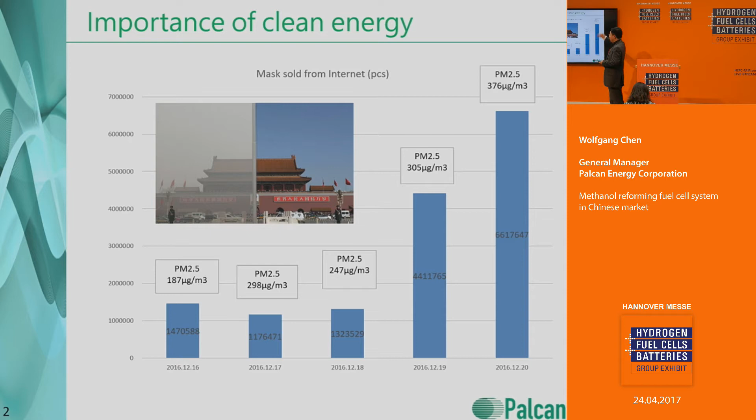This statistic is interesting, with the picture being clear—this one is masks sold. That means people buy many masks when they feel the air is polluted. So you could see everything in China has potential for increase, even masks.

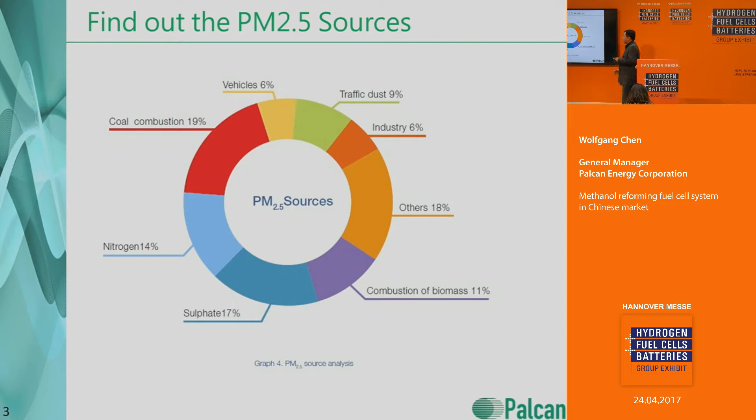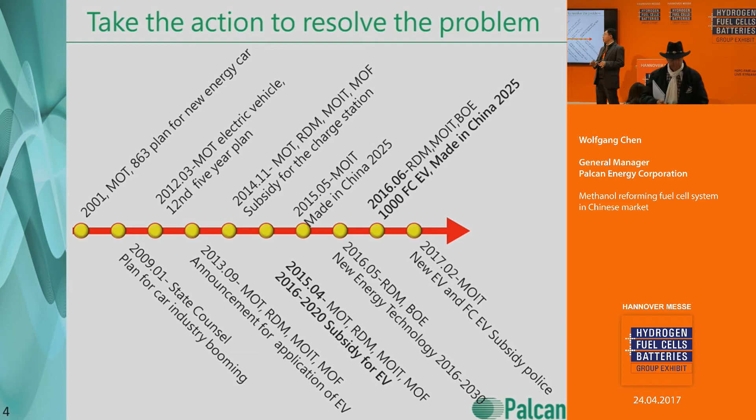How do they get clean air? They started not only with technology, but also with policy. Even from 2001, the Chinese government has been trying to have policies, laws, and regulations to help the people and the industry use clean energy.

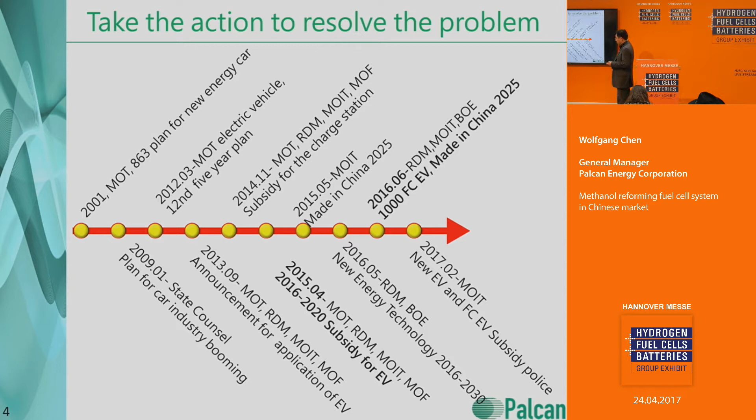Using clean energy normally means it's too expensive, so the government had a strategy to give subsidies to new technology. New means changing coal to something else. Everybody knows that when you burn coal, you have emissions, you have particles. So in stationary applications like power plants, they change from coal to methanol or natural gas.

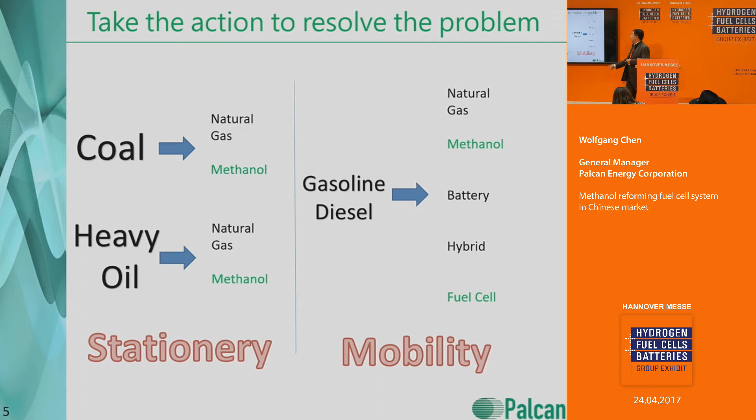Mobility is the same case, but in mobility there are more choices: natural gas, methanol, again methanol. Methanol is clean energy.

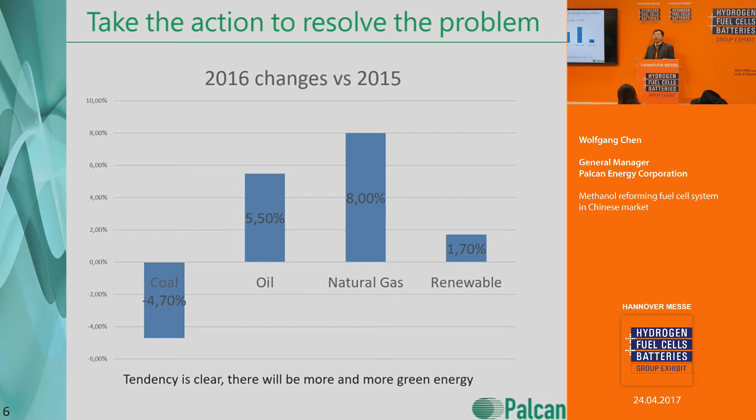You could see that year by year, coal consumption is decreasing. Based on government support, people use more and more renewable energy and natural gas, which is defined as clean energy. So here you could see each year, from 2012 to 2016, there is always an increase in renewable energy. That means clean energy is coming, renewable is the future.

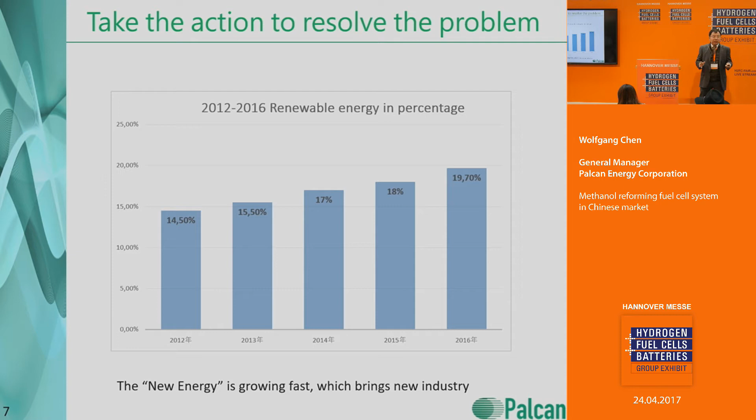One of the most important sources for clean energy is methanol. Methanol is not as clean as hydrogen, but it's still affordable, cheap energy. With methanol you could do a lot of things: direct burning with a motor, or make it a chemical liquid that you could mix with gasoline or diesel.

Again, here in this exhibition, the most interesting thing is methanol combined with electrochemical processes to become a fuel cell.

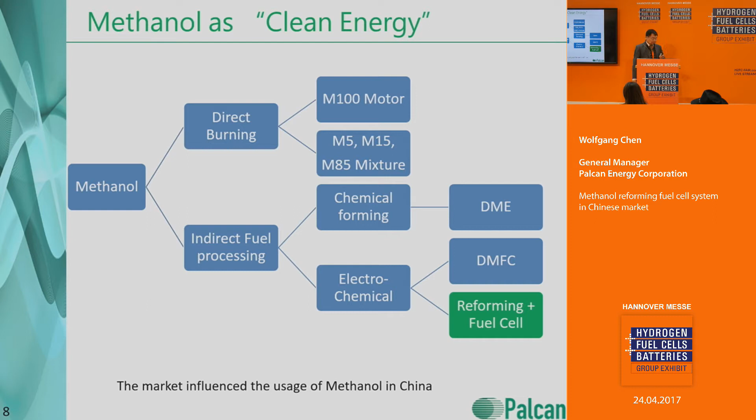Based on such tank stations, you could find methanol in China easily, and the government has made norms and standards for mixtures. For example, M5 is 5% methanol and 95% gasoline. M85 is 85% methanol and only 15% gasoline. M100 is very interesting and is very close to the society of hydrogen.

This picture is interesting because it shows a typical Chinese table in a restaurant—there is a glass, you could put your dish there and everybody could enjoy that. Here is a bottle—in this bottle you could see methanol could easily be sold and bought in China, with a price, after so much distribution, of 0.4 euro per liter.

It has the same effect as gasoline, because the methanol reformed fuel cell system has much higher efficiency than a normal diesel or gasoline burning motor. So at the same price per liter, 0.4 euro, you get the same performance. For example, with a personal car you need only 10 liters per 100 kilometers, so that means you save a lot, and you could get your methanol so easily in China.

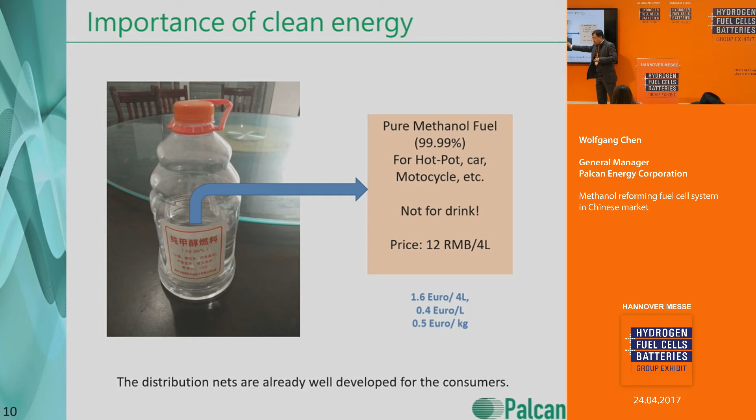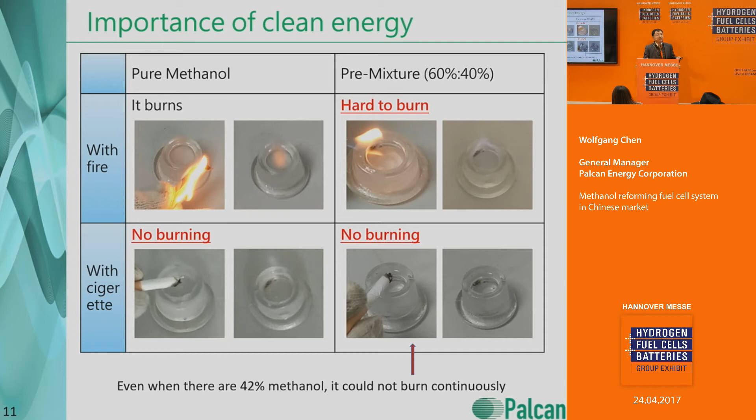Here is a very simple experiment which everybody could do to tell people methanol is safe—much safer than a complicated test. Nowadays, from the internet, you could only see one picture about hydrogen explosion—there's only one. But such an experiment, everybody could do, trying the safety and burning point. It's easy to let people understand it's safe. So methanol is safe.

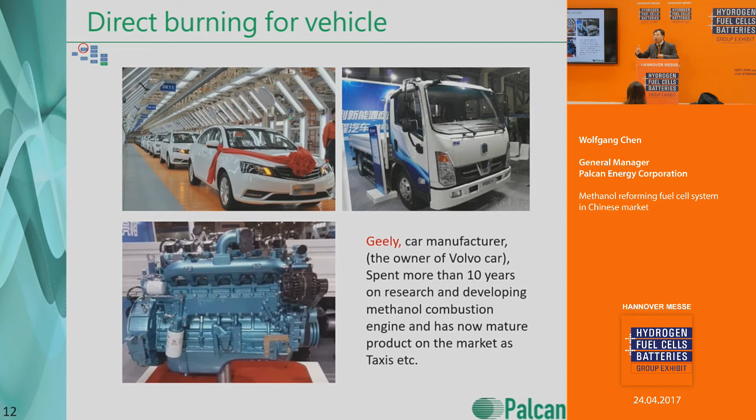And here you could see methanol could be used for burning, for industrial use. This is for work—if you go to a Chinese restaurant and see your dish coming very quickly, that means they might have changed their natural gas burner to a methanol burner, because they increase efficiency by 10% cooking with the higher temperature from methanol. So everywhere is methanol. Methanol is ready for fuel cells.

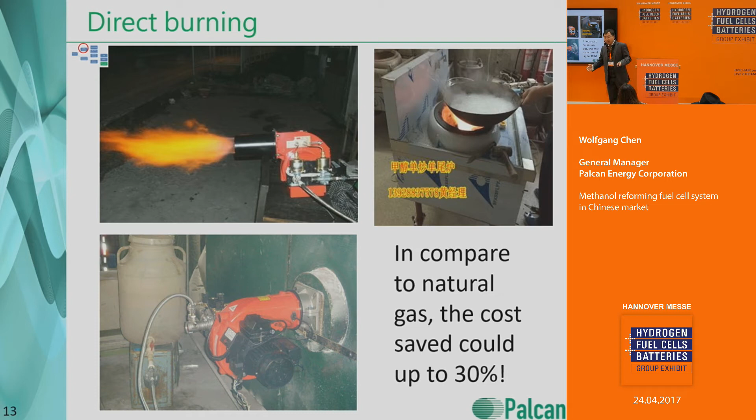One of the markets is the DMFC. Because China is big, there's a lot of area which needs electricity. With DMFC we could make a good hybrid system.

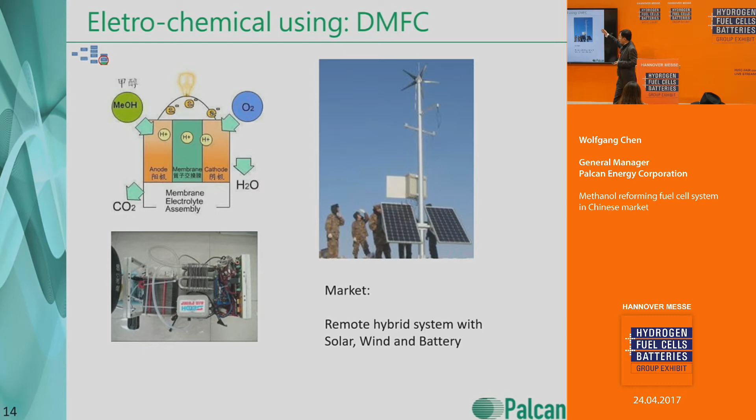Besides DMFC, we have also methanol reformed fuel cell. That means you have the reformer, and then you have more possibilities to get your hydrogen in different forms. Here you have PSA adsorption to get pure hydrogen, you have palladium to get pure hydrogen, you don't need to purify it, you could go to HT-PEM, or water gas shift, or SelOX, you have methanation. So in the world there are a lot of solutions.

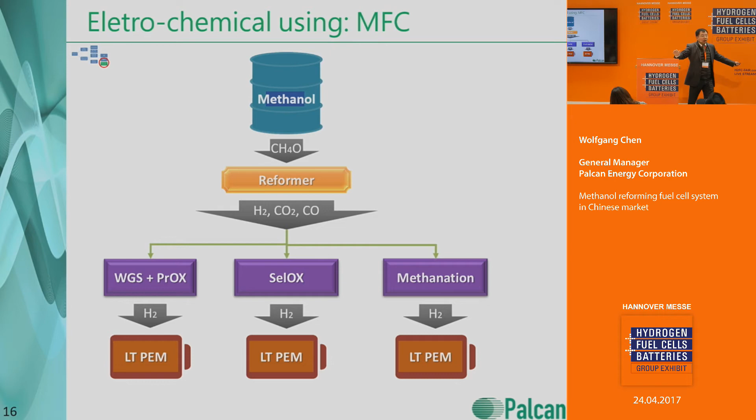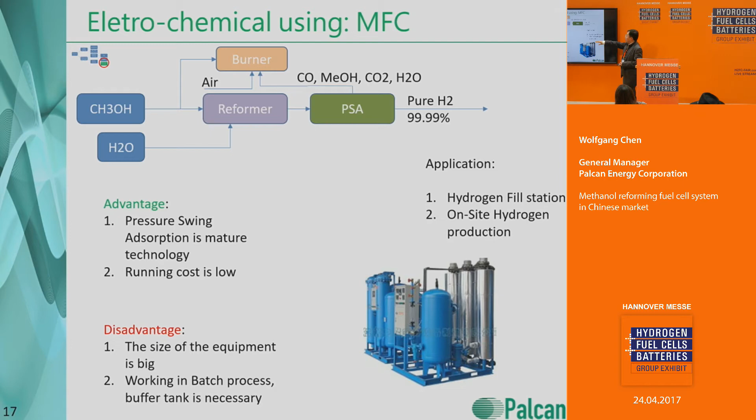People could bring the technology, go to China and make the hydrogen. There is a little bit in detail about different purification systems and different applications.

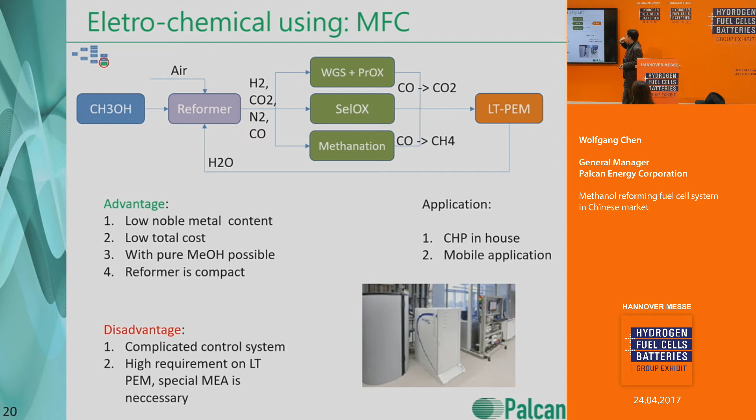So you'll see here palladium membrane, you could see here SelOX water gas shift, and a short bit about what we do.

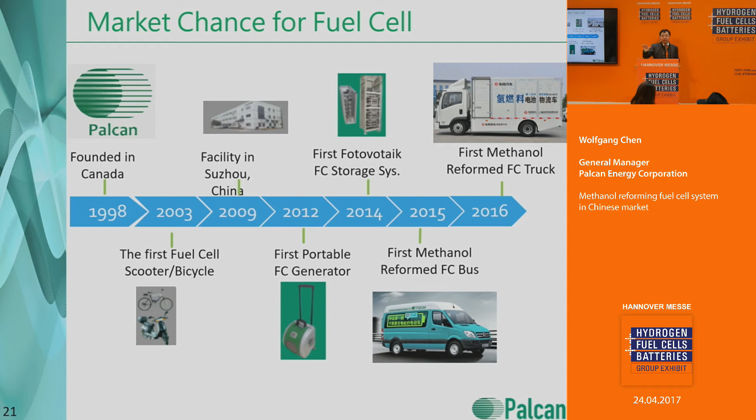We had found the market, and now we have the possibility to introduce ourselves a little bit. We started the business in 1998. It's a long history, but even now, in the past 3 years, we found the opportunity in China with methanol combined with fuel cell. That's the key point for our development.

This is again the background. In 1 month, you'll see here around 60,000 electrical vehicles sold in China, which means China has more and more renewable energy.

At the same time, we see some disadvantages of batteries: short distance, charging time, degradation, and you need a lot of investment. This makes it difficult, but still China will have 5 million stations by 2020.

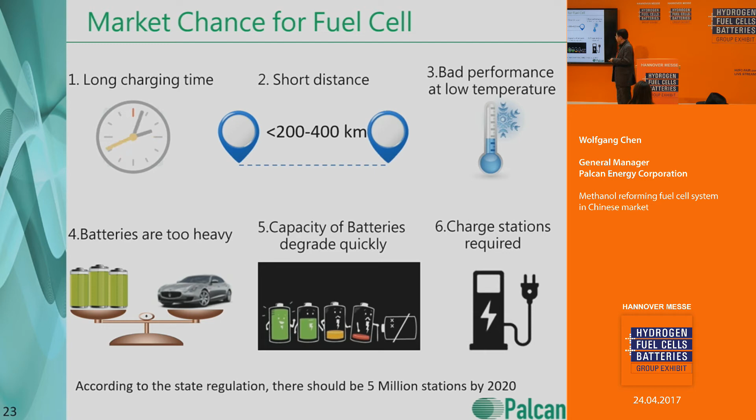So how could we resolve the problem with battery? The solution is hydrogen. Hydrogen is good, welcome, but still something needs to be resolved. Palcan is ready to support that, but remember it takes a little bit of time.

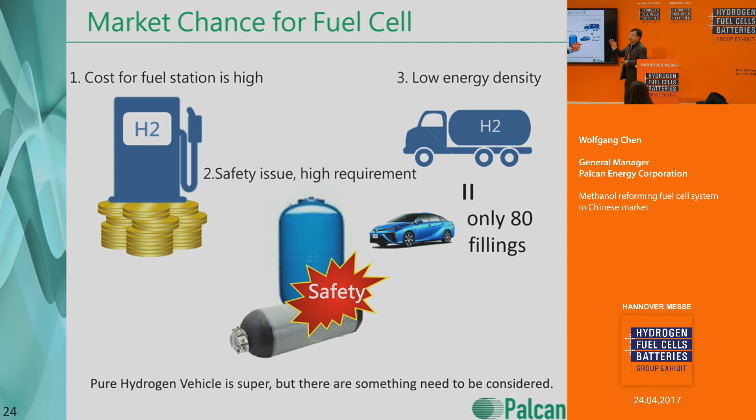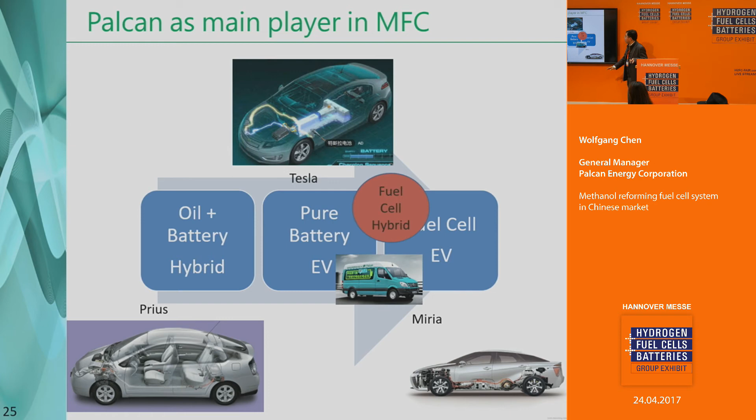So what does Palcan do? Here is a hybrid, from oil to battery. This is Prius, from Tesla to Mirai, there is a hybrid. This is our solution with methanol fuel cell hybrid. This is the solution, you could do that today and tomorrow.

It's a multi-purpose vehicle. It could be used to help electrical vehicles which have problems. When they have low electricity, we go there. So it could be used everywhere, even for telecom.

So what Palcan does is power management system. It's battery, supercaps, and fuel cell. We make our controller to help different systems work together.

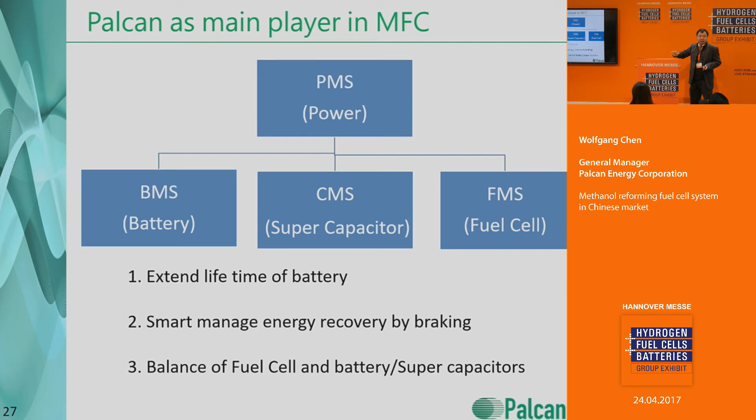This slide is very important. Everybody wants to go to China, they see China is the big market, we go there, there is chance. But one thing is quite important: you must understand the Chinese government and the market.

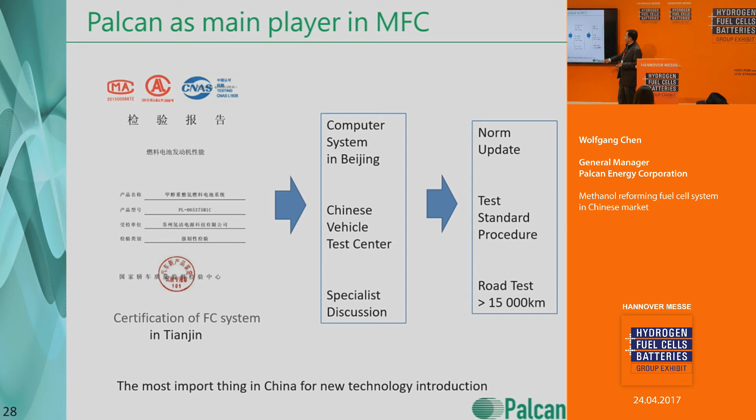Palcan had to do a lot of discussion with the government to let them understand fuel cell is not only high pressure tank, it could be methanol, it could be liquid hydrogen, it could also be hydrogen storage in metal form. So to let the specialists understand that, we need to educate them, introduce them, and let them see our test report. Palcan is very strong in this case, to help people go to China, change their product to a real market-accepted market, and try to get the subsidy from the government.

So this is our strength.

Again, if you see electrical vehicles with higher energy, you need heavy battery, but we have the solution with a small vehicle for 1 megawatt hour energy. This could be used to charge electrical vehicles, for emergency backup power. This is the solution from Palcan.

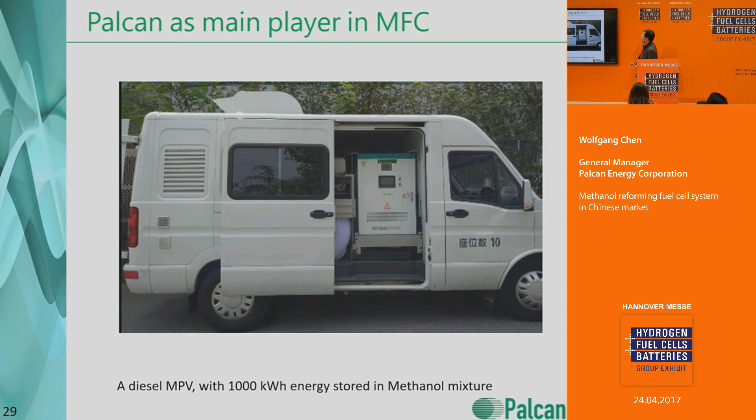This here again is supercaps. That means lithium battery is not 100% necessary for electrical vehicle.

So the last slide for my talk, I want to show you this Dongfeng. I'll make some Chinese language here. Dongfeng is east wind, wind from the east, and east wind changes your mind. That means with a good system, all together we could change the world.

That's all the reason why we are coming here and why we try to make our intelligence work into a product which everybody could feel it and enjoy it. Thank you, thank you very much.